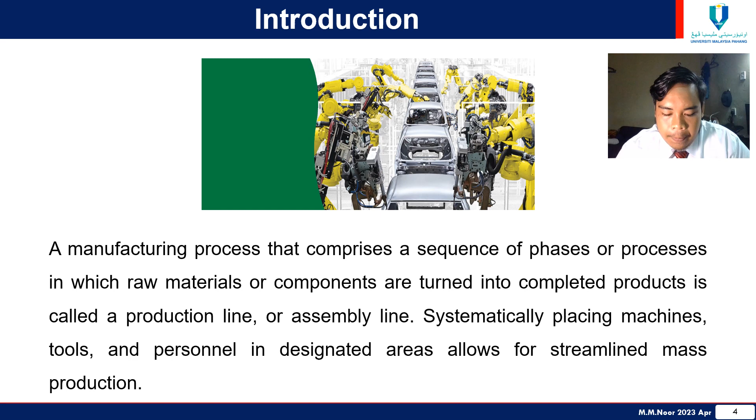Introduction: a manufacturing process that comprises a sequence of phases or processes in which raw materials or components are turned into a complete product is called a production line or assembly line. Systematically placing machines, tools, and personnel in designated areas allows for streamlined mass production.

We also have goals and objectives. The main goal of the new car project is to create a functional, safe, and attractive electric car that meets the needs and preferences of the target customer, maximizes profitability, incorporates innovation, strengthens the manufacturer's brand, and meets regulatory compliance, including safety standards.

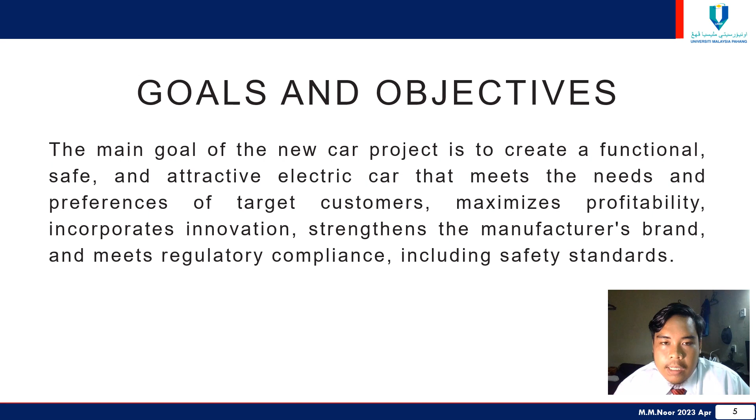New technology. The new car will have a minimalist and compact design catering to the preference of the younger generation and providing fuel saving. It will include advanced technology such as connected vehicle, ADAS, and lightweight material to improve safety, fuel efficiency, and traffic flow.

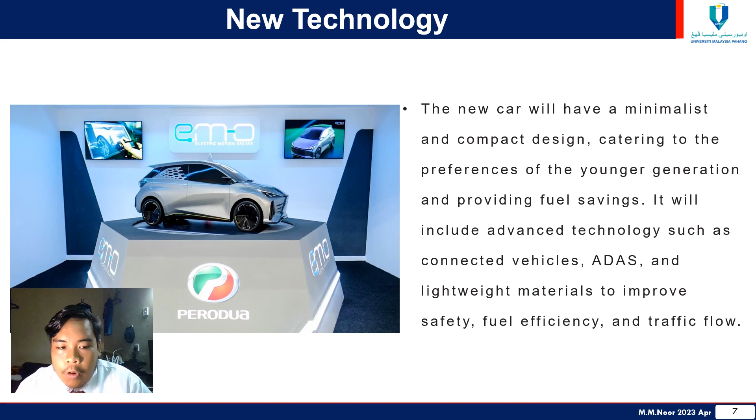Production of electric vehicles requires a wide range of raw materials, including both universal elements and specialized elements specific to electric vehicle technology. The raw materials are separated into two categories: first, material for electric motor batteries, and second, vehicle body parts.

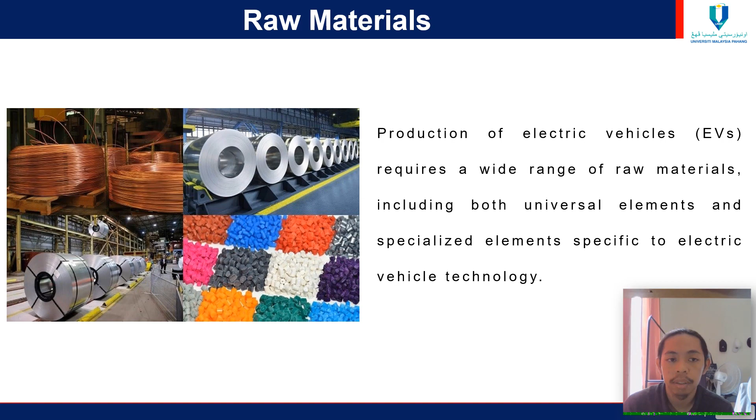One of the basic materials to make a motor battery is copper. Copper is a crucial material in electric motors due to its excellent electrical conductivity. It is used extensively in the winding of the motor stator and rotor.

Second is iron and steel. This material is very necessary because electric motors require magnetic material to generate the magnetic field necessary for operation. These materials have high magnetic permeability, which allows for efficient magnetic flux generation and reduces energy losses.

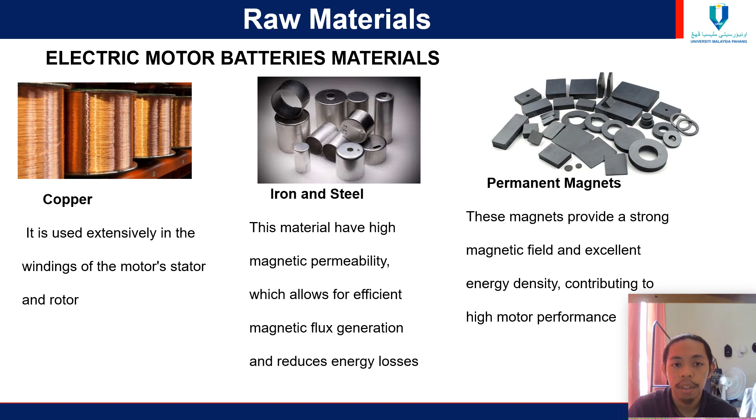Next material is permanent magnet. This magnet provides a strong magnetic field and excellent energy density, contributing to high motor performance. Aluminium is also needed for construction of the motor housing, providing a lightweight and cost-effective solution while offering good thermal conductivity.

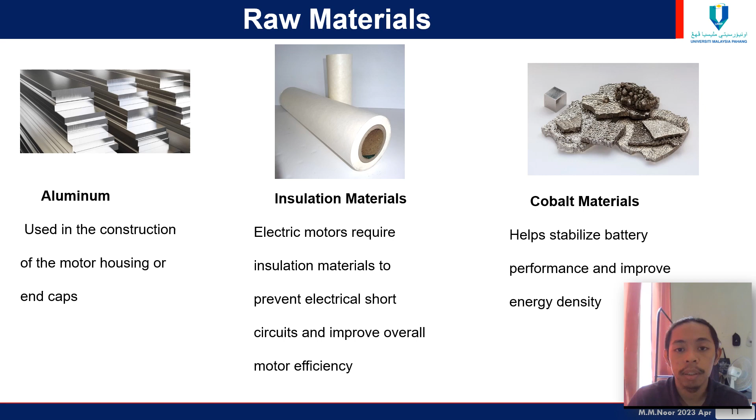Next, if related to electricity, we must use insulation material to prevent electrical short circuit and improve overall motor efficiency. Cobalt is the element used in lithium-ion batteries to stabilize battery performance and increase energy density.

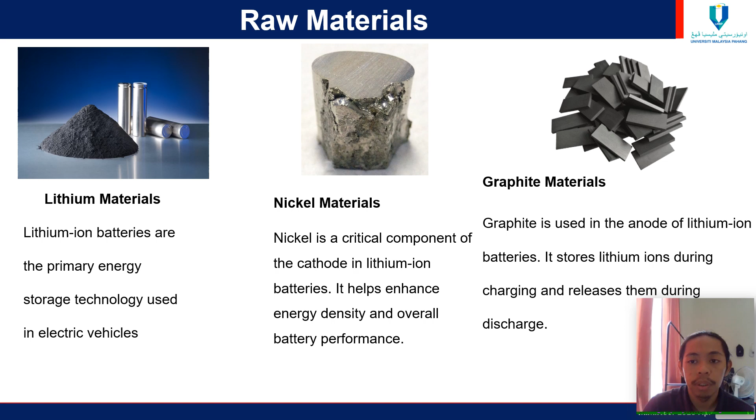In addition, elements such as lithium, nickel, and graphite are the primary energy storage materials used in electric vehicles. Nickel helps enhance energy density and overall battery performance; higher nickel content in batteries can lead to increased energy storage capacity. Graphite is used in the anode of lithium-ion batteries to store lithium ions during charging and release them during discharge.

Next, I will explain the materials used to make the vehicle body parts. There are five basic materials. First is steel, which is utilized in the vehicle body structure and other structural components.

Second, plastic. Various plastic materials are used in EV production for interior components, exterior parts, and lightweighting purposes. Plastic offers design flexibility, durability, and weight reduction benefits.

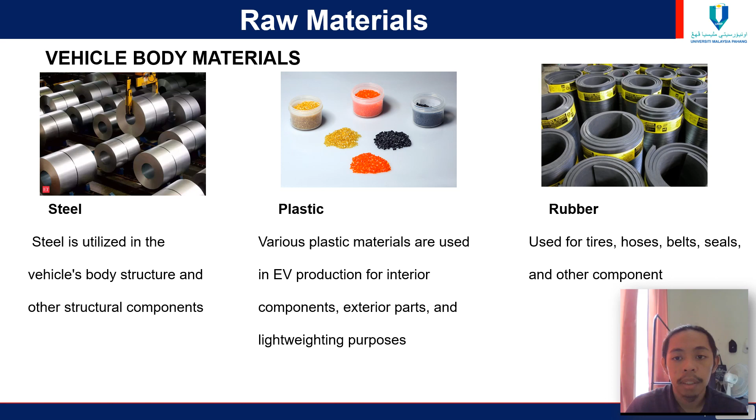Rubber is the third. It is used for tires, hoses, belts, and seals to provide flexibility, sealing properties, and vibration damping.

Fourth is aluminum, an essential material in vehicle manufacturing. It is used for wheels, body panels, and other parts where weight reduction is desired, offering a good balance of strength and lightweight properties.

Last but not least, automotive glass, for example as windscreen, side windows, and rear windows, is created from a combination of raw materials such as silica sand, soda ash, limestone, and other additives.

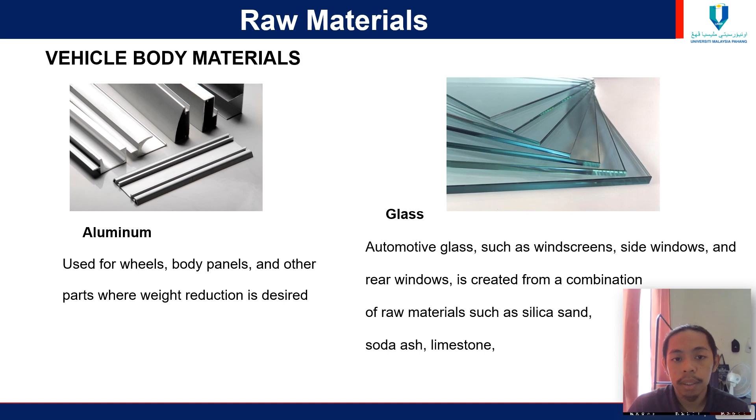We will go through the production line topic. Production line manufacturing, also called assembly line manufacturing, is a very efficient and well-organized way to make cars. It involves several steps and processes in which different parts and pieces are put together step by step to make a finished car. This way of manufacturing has changed the way cars are made.

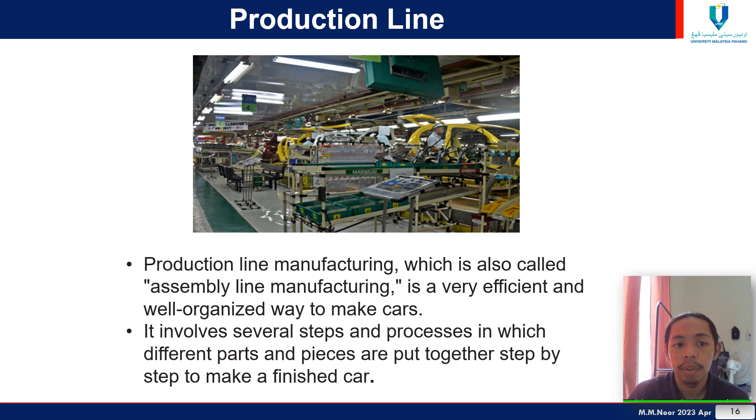It has made mass production possible, cut costs, and kept a high quality standard while doing so. Most of the time, the production line is made up of different stations or workspaces, each responsible for a certain step in the building process.

Five criteria we consider while planning the production procedure are quality, speed, reliability, adaptability, and cost. The most crucial criteria for new EV manufacturing is adaptability, which refers to the ability of a production system or workforce to respond and adjust effectively to changes in demand, product specification, technology, and other variables. It involves being flexible, proactive, and efficient in accommodating change and ensuring smooth operation.

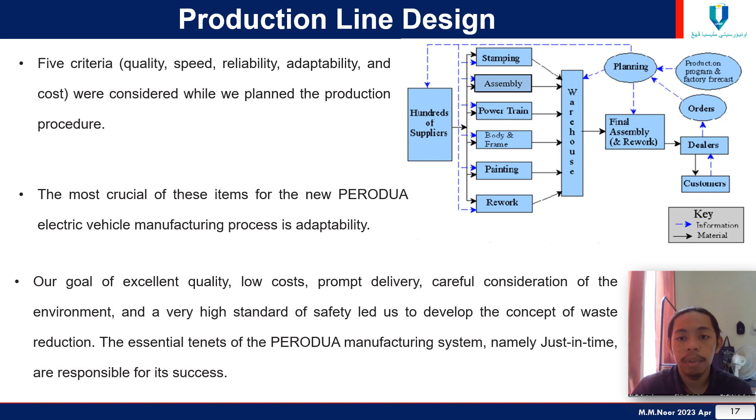Our goals of excellent quality, low cost, prompt delivery, careful consideration of the environment, and very high standards of safety led us to develop the concept of waste reduction, the essential tenet of the manufacturing system, namely just-in-time, which are responsible for its success.

Next, assembly line. The manufacturing process of assembly line production involves a sequential arrangement of workstations where each workstation performs a specific task in the production process to create a finished product. Common elements exist in every assembly system. Regardless of the layout, the three fundamental components are station, work task, and operator. The assembly system can comprise a single or multiple stations at a time.

Next, my friend Aiman Hakim will continue this presentation.

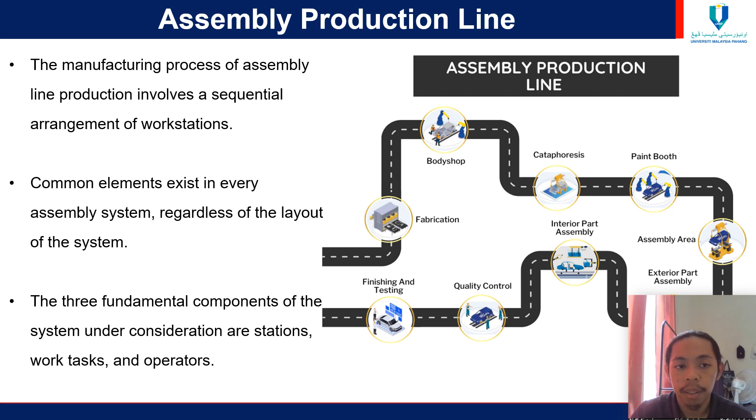For the manufacturing process, fabrication of the vehicle frame and chassis typically initiates the process. The sheet metal parts for the bodywork are created and stamped by robots. These parts, including side frame, doors, and roof, are later added into the main frame of the car. This process of creating a sturdy and inflexible framework entails joining and connecting metal parts through welding.

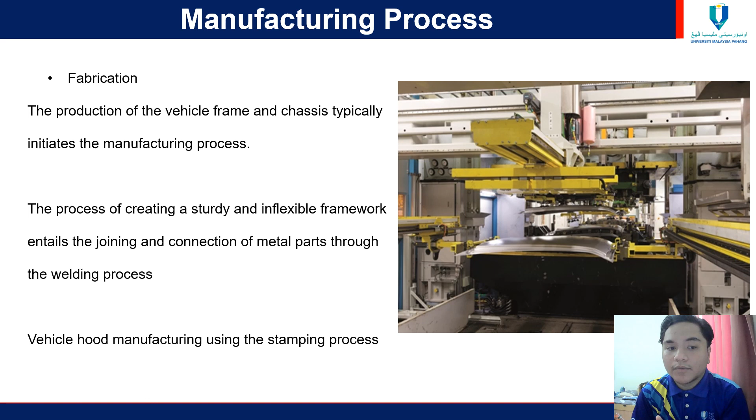The next manufacturing process is the body shop. The car will travel along a moving assembly line in a factory as robots and people work on it. Manufacturing plant workers will attach parts to the car, and many work alongside robots for certain tasks. Robotic work cells will work alone to weld, solder, screw, and glue parts into the car. This process of car assembly in manufacturing plants involves the collaboration of human workers and robots for specific tasks.

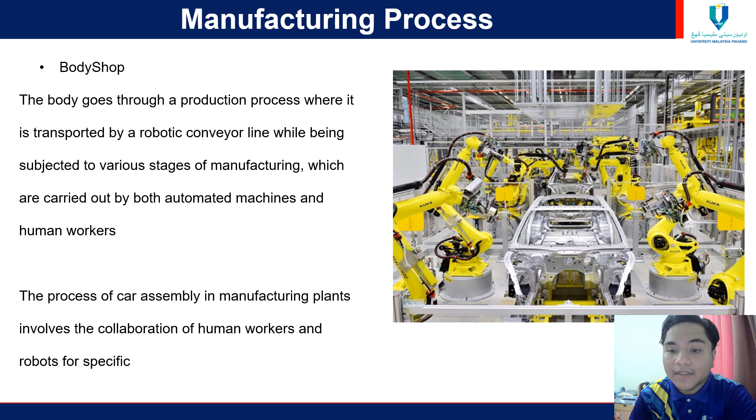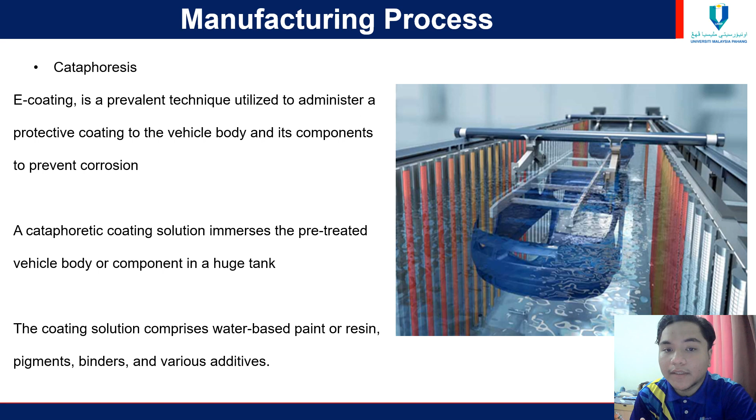The next manufacturing process is cataphoresis. A cataphoretic coating solution immerses the pre-treated vehicle body or component in a huge tank. The coating solution comprises water-based paint or resin, pigment, binders, and various additives. It's a technique to administer a protective coating to the vehicle body and its components to prevent corrosion.

The next part is the paint booth. Once the parts of the body are manufactured into the car, it will undergo detailing, including cleaning, layering chemical formulas for protection against corrosion and scratches, and painting. Then a robotic hand will spray an initial base coat and a clear top coat, and the car will pass through a curing process in a baking oven with temperatures above 135 degrees Celsius.

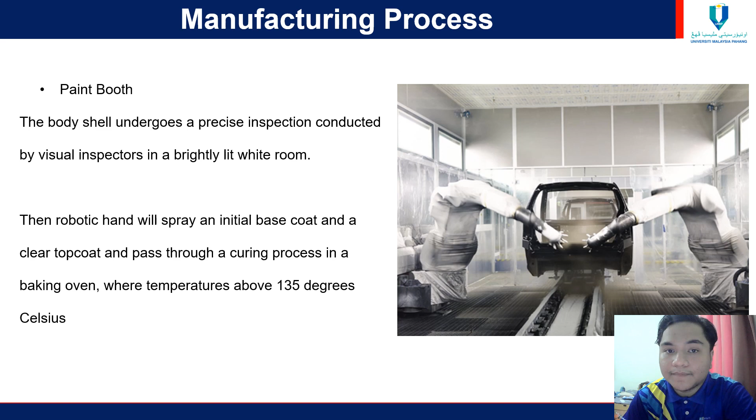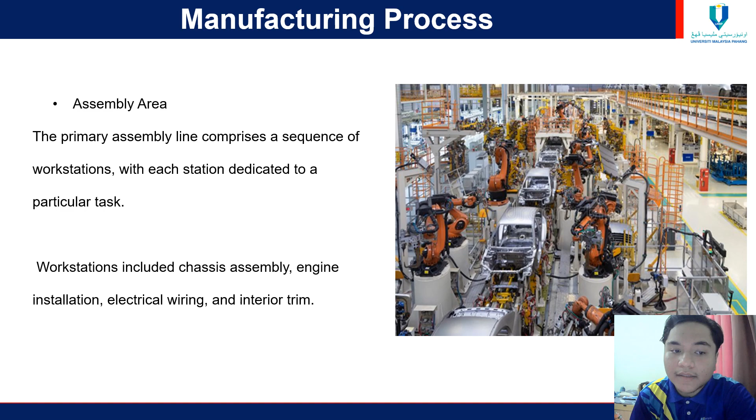The next manufacturing process is the assembly area, comprised of workstations with each station dedicated to a particular task, including chassis assembly, engine installation, electrical wiring, and interior trim.

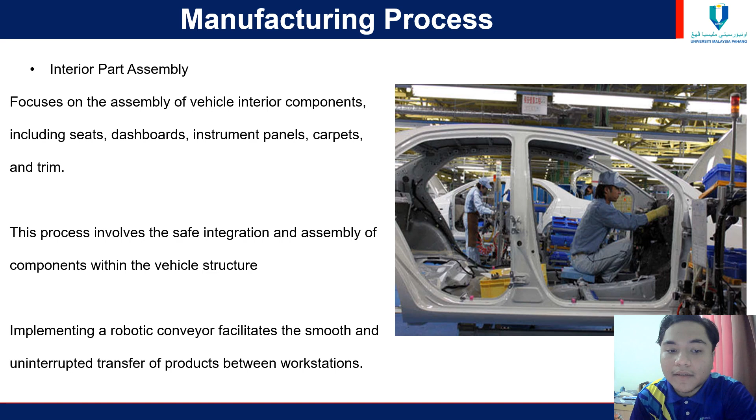The next part is interior part assembly. This includes all instrumentation and wiring systems, dash panel and interior lights, door trim panels, radio and speakers, all glass except the windshield, steering column and wheel, body weather stripping and bumper fascia, carpeting, and all other interior components, assembled in this area by a large number of workers. This process involves the safe integration and assembly of components within the vehicle structure, and implementing a robotic conveyor facilitates the smooth and uninterrupted transfer of products between workstations.

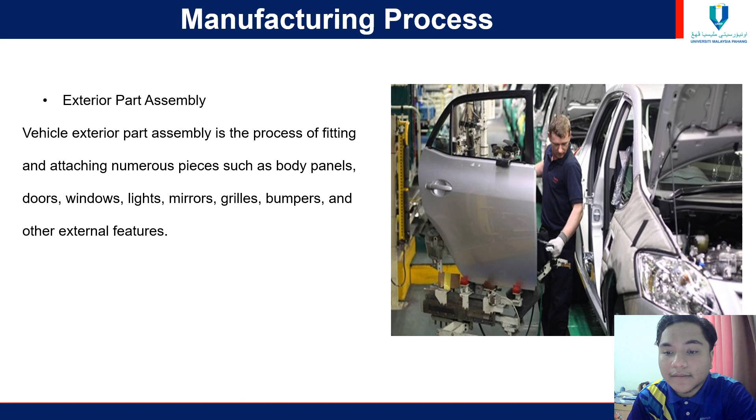The next manufacturing process is exterior part assembly. The engine, transmission, axle, and exhaust system are installed into the car, and the tires are fitted so the car can stand on its own. This is the process of fitting and attaching a number of pieces such as body panels, doors, windows, lights, mirrors, grilles, bumpers, and other external features.

The next manufacturing process is quality control. After all the assembly, the vehicle needs to be tested, packaged, and shipped to the assembly plant on the same day that it will be used. This requires a substantial amount of planning. Outside part suppliers are subjected to testing and inspection audits like those used in assembly plants by most car manufacturers. As a result, the manufacturer facility may ensure that the goods they receive are defect free.

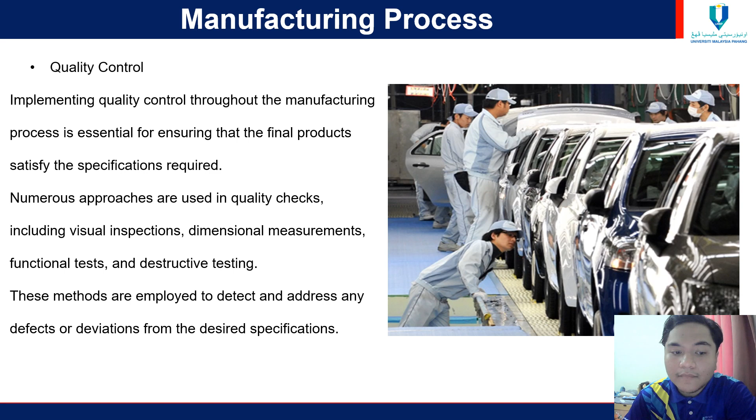So for the final manufacturing process, we have finishing. This involves a functional test and comprehensive quality checks to verify the final product meets all specifications, performance standards, and safety regulations. It includes external panels, lighting, interior components, and branding components added toward the end of the production process by workers or robotic machinery.

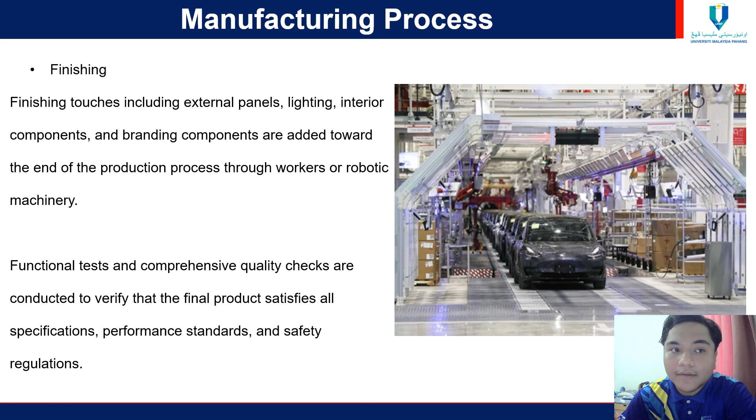For manufacturing inventory, we have three parts. First, raw material and work in process. Second, maintenance, repair, and operating. Third, finished goods and spare parts. Keeping a supply of raw material, work in progress, and completed items on hand is essential for any manufacturer to keep up with production and satisfy consumer demand. It represents the actual resources needed to make a manufacturing company run efficiently and reach its output targets.

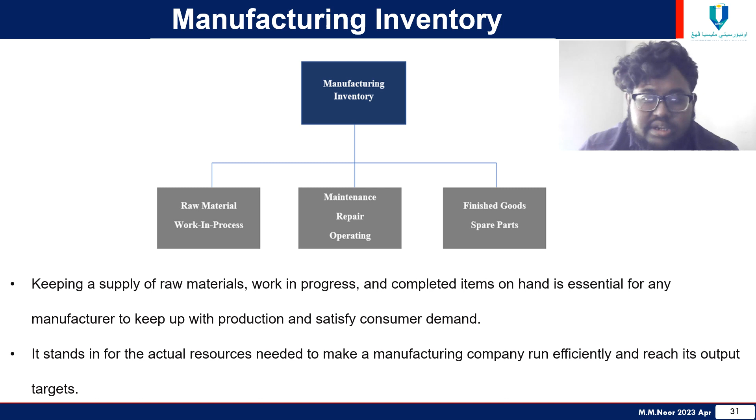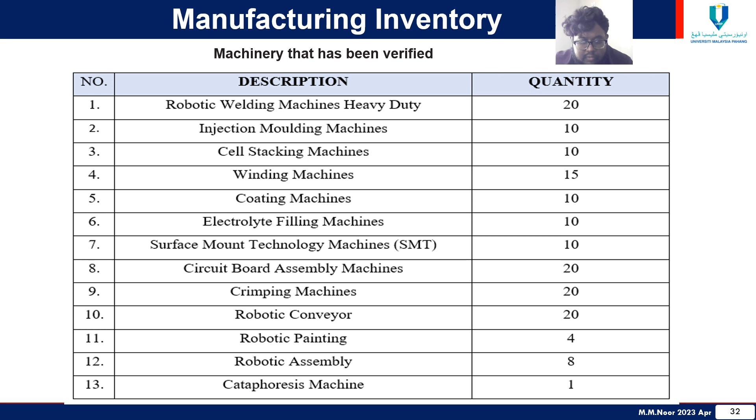Eighth, circuit board assembly machine, about 20 pieces. Ninth, crimping machines, also 20 pieces. Tenth, robotic conveyor, also 20 pieces. Eleventh, robotic painting, about 4 pieces. Twelfth, robotic assembly, about 8 pieces. And lastly, cataphoresis machine, 1 piece.

An asset is something that has value or will be useful in the future. A piece of machinery, a financial security, or a patent are all examples of assets that can make money in the future. Some examples of personal assets are a house, a car, stocks, art, and home goods. These are what the show has going for it.

For the table, number one is robotic welding machine heavy duty. The supplier is ESAB Welding and Cutting Products. We have a total amount of 20 machines, and the price per machine is 21,619 ringgit.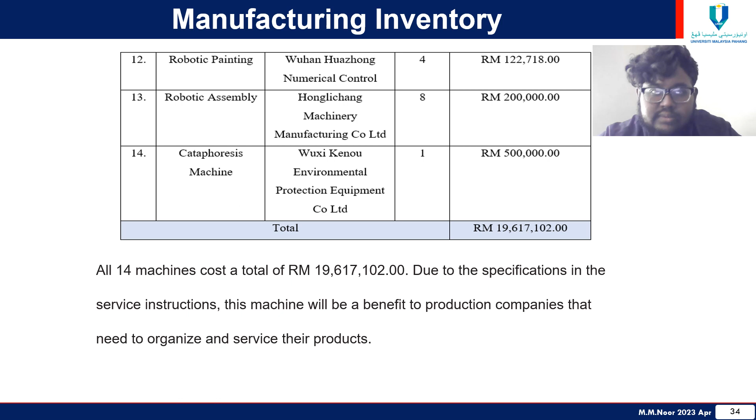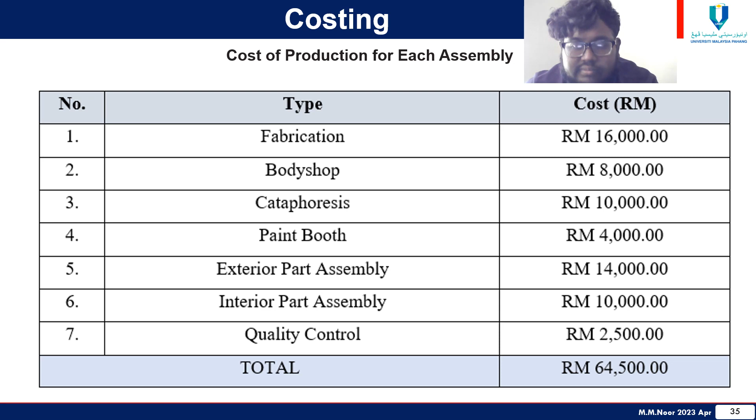Next we have cost of employee. First, engineer, the salary is about 7,000 ringgit per month. Second, technician, the salary is around 3,000 ringgit per month. Third, diagnosis specialist, the salary is around 5,000 ringgit per month. Fourth, operator machines, the salary is around 2,800 ringgit per month.

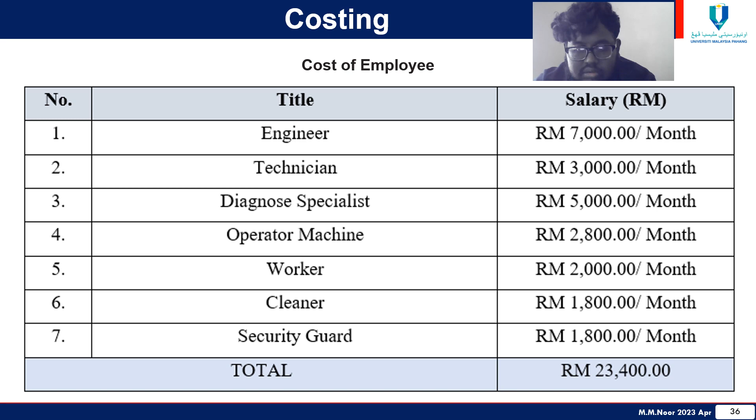Fifth, worker, the salary is around 2,000 ringgit per month. Sixth, cleaner, the salary is around 1,800 ringgit per month. And lastly, seventh, security guard, the salary is also around 1,800 per month. So for the total cost of the salary, we have around 23,000 ringgit and 400 ringgit per month.

Okay, for the next chapter, we have results.

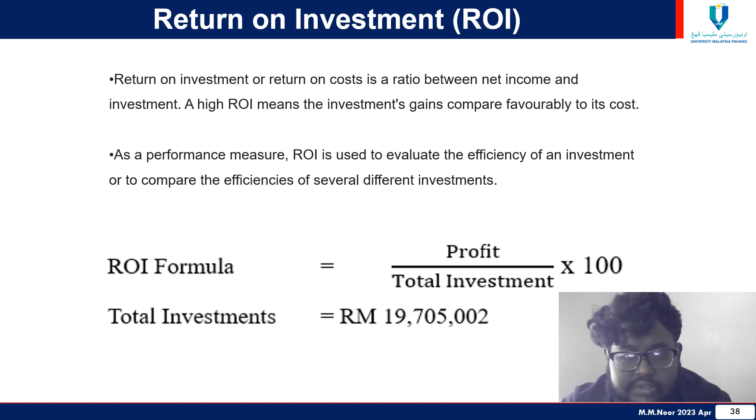Return on investment, or return on cost, is a ratio between net income and investment. A high ROI means the investment's gain compares favorably to its cost. As a performance measure, ROI is used to evaluate the efficiency of an investment or to compare the efficiencies of several different investments.

Below is the example or formula for ROI. To explain the sales price and profit calculation for this segment of vehicle production, the electric vehicle is anticipated to sell for around 80,000 ringgit per unit. Below is the formula for calculating the monthly vehicle manufacturing value. The vehicle price is 80,000 ringgit per unit, and vehicle production is around 84 units per month.

For the profit for 1 month, we have 80,000 ringgit times 84 units, which equals 6,720,000 ringgit.

To explain how ROI is calculated for 6 months, first we must obtain a return on investment for 6 months of production, which requires calculating the manufacturing efficiency. With an existing total investment of 19,705,002 ringgit, this yielded a return on investment of 104.6% according to the findings.

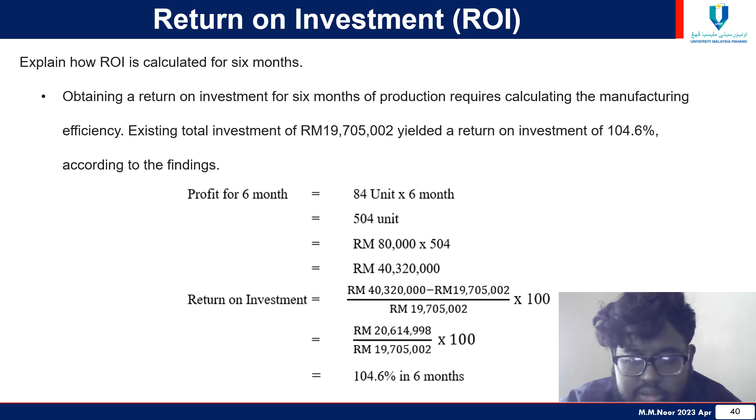Finally, to explain the 1 year ROI calculation: in 1 year, a total of 1,008 automobiles worth 80,640,000 ringgit were manufactured. Compared to the previous 6 months, the return on investment in production increased to 309.23%.

So for the formula, we already know 84 units times 12 months equals 1,008 units. That's 80,000 ringgit times 1,008 units, which equals 80,640,000 ringgit.

So to calculate the return on investment, we have 80,640,000 ringgit minus 19,705,002 ringgit, divided by 19,705,002 ringgit, times 100.

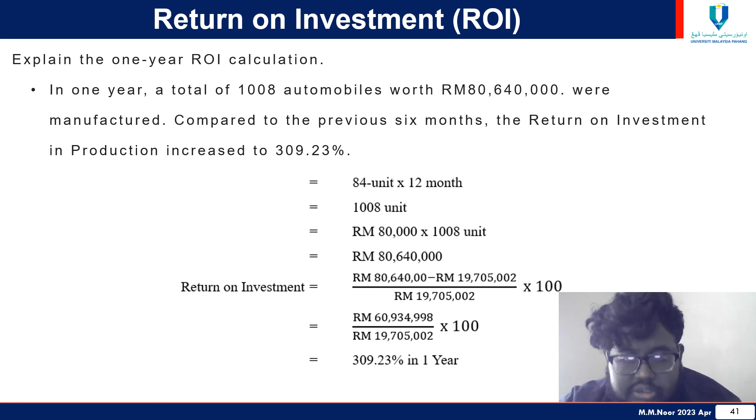Okay, I will continue about the discussion. The total cost of a new project car can include a wide range of expenses, including the cost of design and development, tooling, manufacturing, marketing, and logistics.

Research and development is included with designing and testing the new car, including engineering, prototyping, and testing. For the next is tooling.

Tooling is the cost of creating the tools and equipment needed to manufacture the car, including the most specialist machinery. For materials, the cost is of the raw materials and components used to build the car, including steel, aluminum, plastic, and electronic components.

For labor, the cost is of the workers who assemble the car, including wages, benefits, and training. For manufacturing overhead, the cost is of running the factory, including utilities, rent, insurance, and other indirect costs.

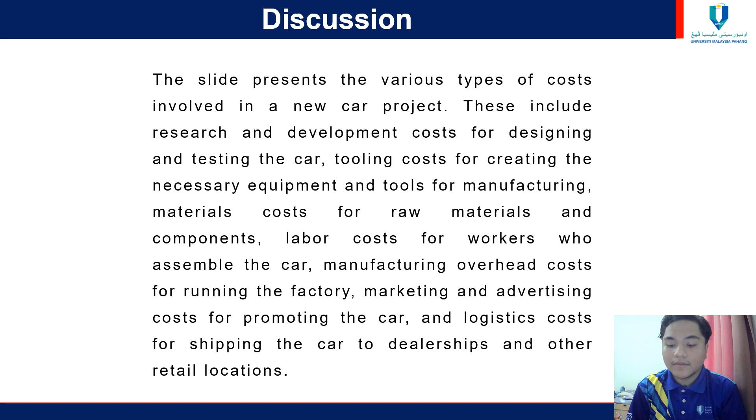So for the conclusion, a new car project is a complex undertaking that involves a wide range of activities, including research and development, design, tooling, manufacturing, marketing, and logistics. The goal of a new car project is to create a car that is functional, safe, and appealing to consumers while also being profitable for the manufacturer.

The process of creating a new car begins with research and development, where designers and engineers work together to create initial sketches and ideas for the car's appearance and functionality. This is followed by styling, where detailed drawings and models of the car's exterior and interior are created. Then the engineering stage, where the car's mechanical and electrical systems are designed and developed, including engine, transmission, suspension, and other components.

Overall, creating a new car is a complex, multifaceted process that involves many different activities and a significant investment of resources. Careful planning and management are essential to ensure that the project is successful and that the final product is appealing to consumers and profitable for the manufacturer.